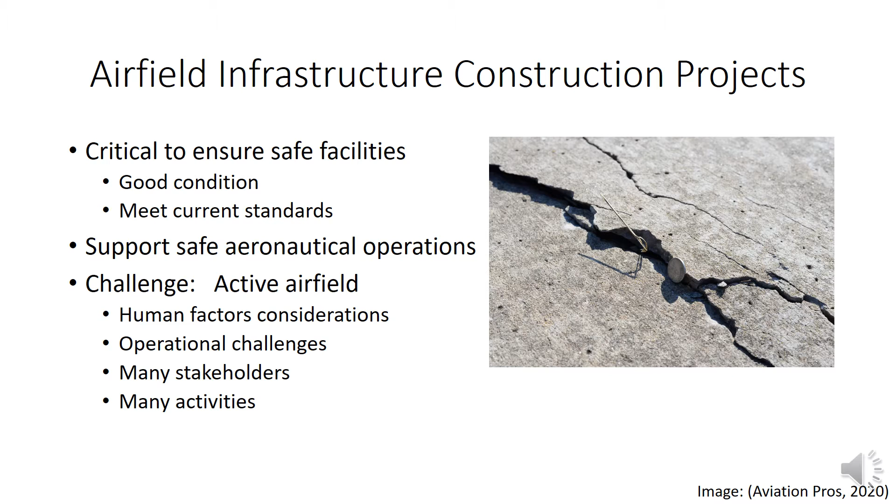Airfield construction projects are challenging because they are usually conducted while aeronautical operations at the airport continue. This introduces human factors considerations and operational challenges, and there are numerous stakeholders and many activities that are affected during these construction projects.

To provide some idea of the scope of airport development and airport construction, let's look at NPIAS, our National Plan for Integrated Airport Systems. NPIAS is the framework for federal funding for airports and the improvements needed. Over $34 billion have been identified for airport projects from 2021 to 2025. This includes reconstruction projects, projects to bring facilities up to current standards, and projects to improve the safety and increase the capacity of our airfields.

Here's an overview of today's presentation. First, I will provide a context for the topic based on literature related to airfield construction. I will present data related to airfield safety and discuss the human factors considerations, which provides a framework for mitigation measures to increase safety during airfield construction.

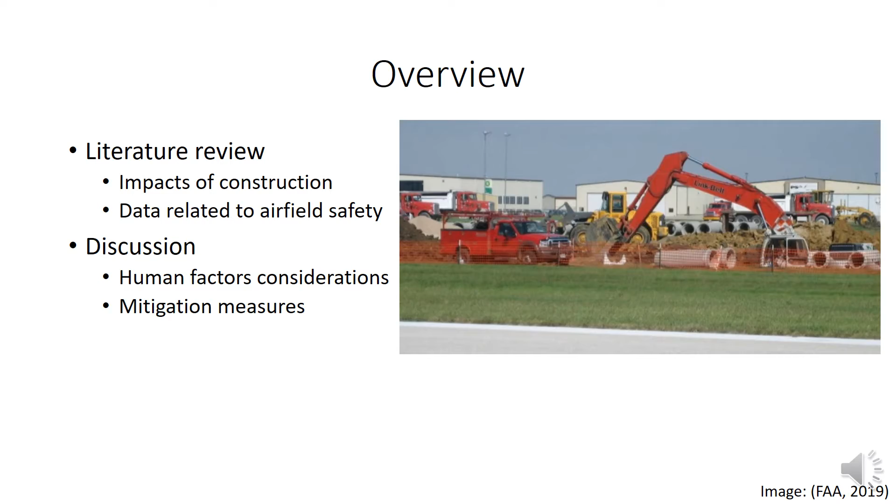FAA recognizes that there are potential safety challenges related to airfield construction and provides a very detailed advisory circular about operational safety considerations during construction. A key consideration is the development of a plan for safety during each phase of construction. These are called construction safety and phasing plans.

Another important component is the use of checklists and daily inspections conducted by the airport ops personnel to ensure safety is maintained on the construction site and the adjacent airfield. Other topics include operational issues and standards for signs and barricades.

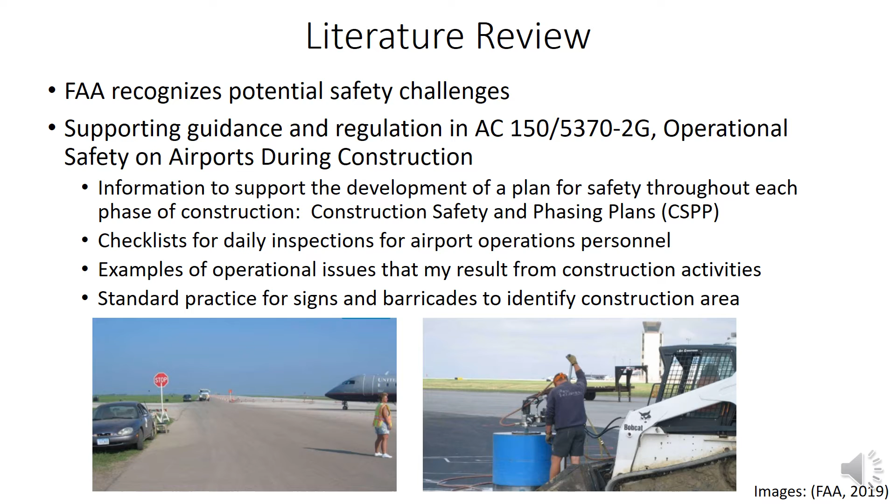There is limited information in scholarly publications related to construction safety at airports. There is some research related to the construction of the Denver International Airport, an enormous project and one of the biggest and most recently constructed new airports in the United States. There were almost 3,000 construction contracts and there were over 4,000 injuries and illnesses, which illustrates the magnitude of the risks to construction workers on a large airfield project.

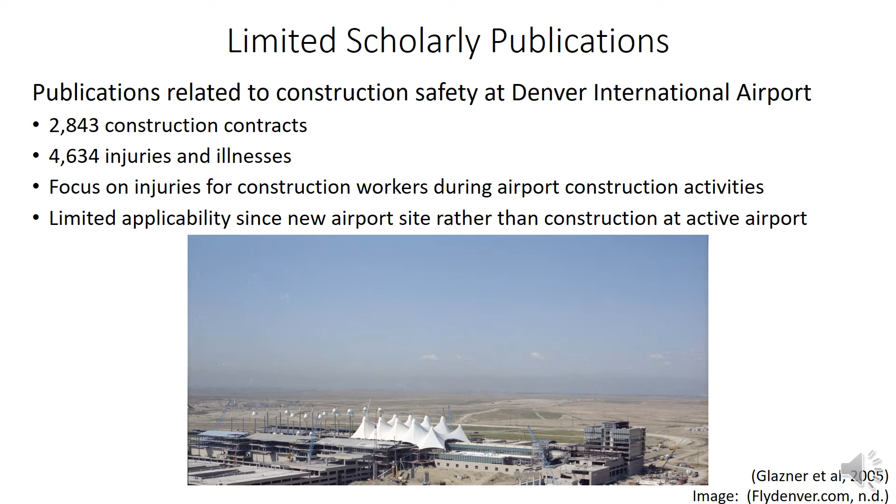This doesn't capture all of the issues related to airfield construction, since this was a new airport site rather than construction at an active airport, which introduces additional challenges. Airfield construction can affect pilots, air traffic controllers, airport operations personnel, and airport tenants. Airfield construction can disrupt flight training and have a significant impact on emergency responders.

There are many construction characteristics that impact how the construction project affects operations at the airport, such as the number of personnel, the kinds of equipment and materials, where the materials are stored, the nature of the construction activity, and where the construction site is relative to the rest of the airfield, as well as site access. Impacts to airport operations include the inspection schedules and the impacts of construction activities on the wildlife hazards, FOD hazards, and security.

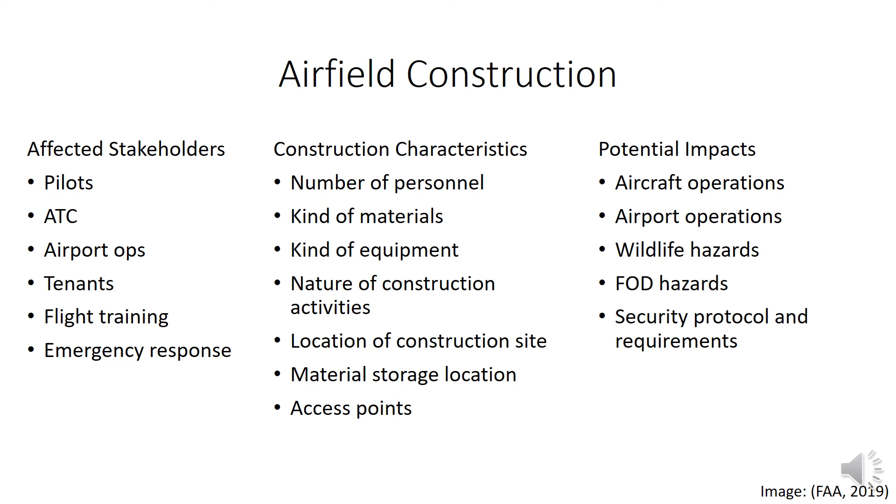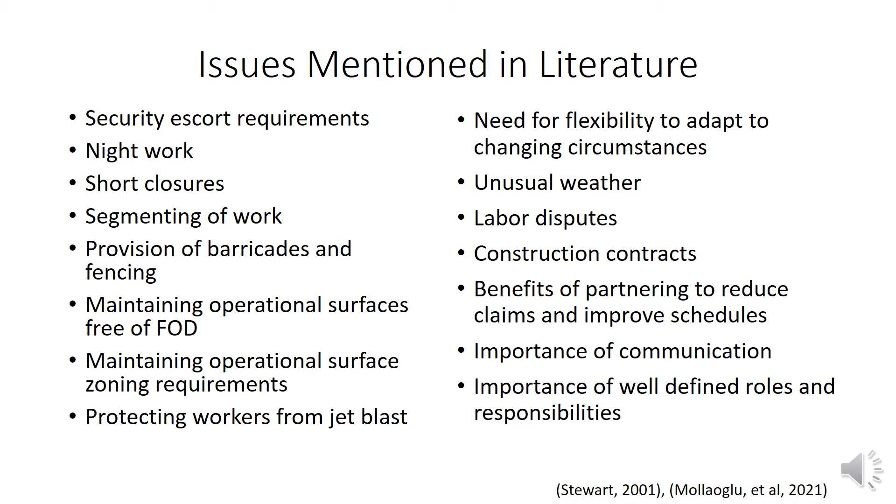Here is a list of issues mentioned in the literature, which include security issues and closures. Some of these issues affect all construction, such as contracting issues, labor issues, and weather. Other topics are unique to airport construction, such as FOD, protection of the operational surface, and protection of workers from jet blast.

This slide illustrates data from the Runway Incursion Database, which is published by FAA. This illustrates the impact of construction on runway incursions. The graph on the left illustrates runway incursions during construction, and the graph on the right illustrates all runway incursions.

During construction, 46% of runway incursions are related to vehicle and pedestrian deviations, which is almost double the percent during all events. Pilot deviations are about 20% during construction, but represent 60% of all incursions. Operational errors due to air traffic control represent 33% of incursions during construction, about double the percentage during all events.

This data suggests that we are doing a good job supporting aeronautical activities during construction, but may need to take a closer look at how we support construction activities, airport operations, and air traffic control during construction.

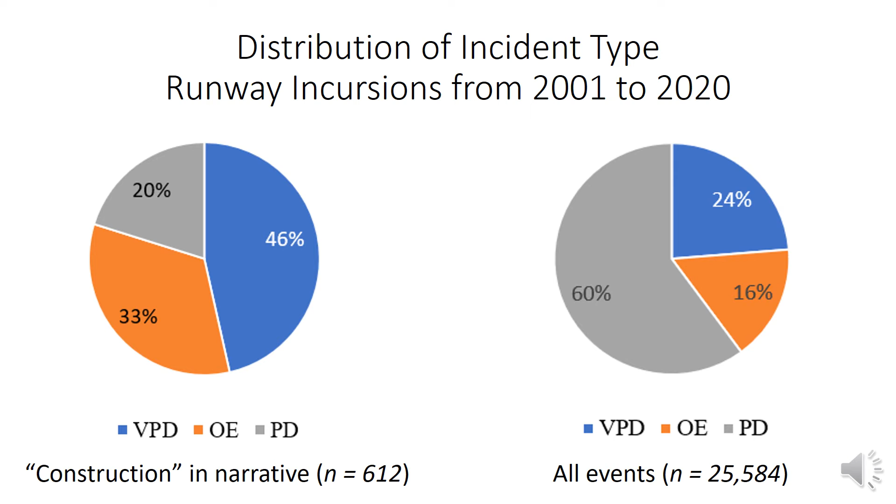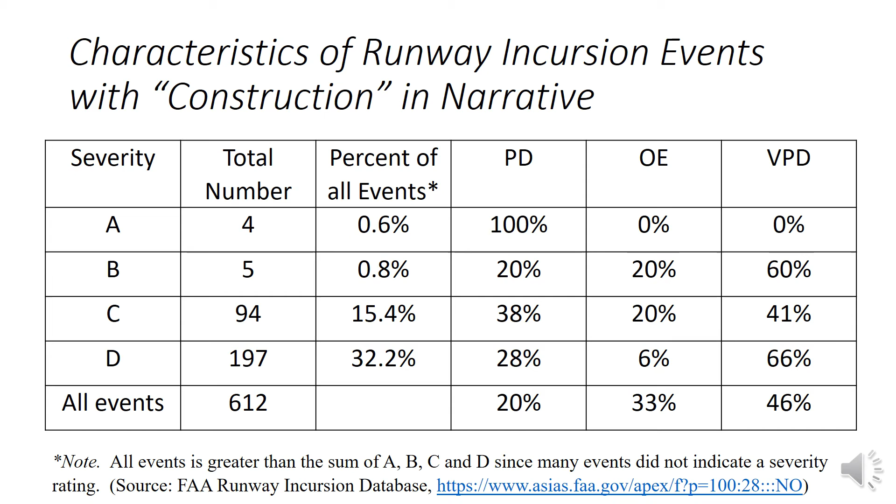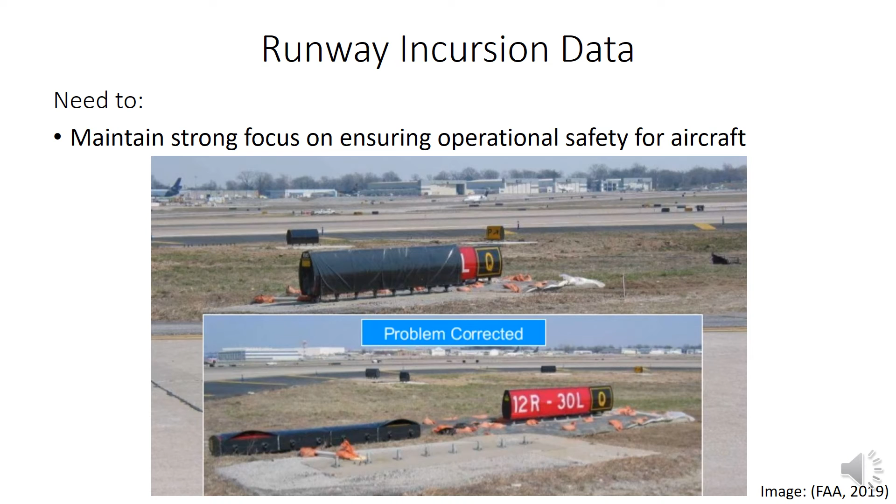The runway incursion data suggests that we need to maintain a strong focus on ensuring operational safety for aircraft, but we also need to make sure we are addressing some of the other airfield users and reducing the likelihood of vehicle pedestrian deviations. Strategies include construction limit signs at regular intervals. These signs support situational awareness for construction personnel and airport ops personnel.

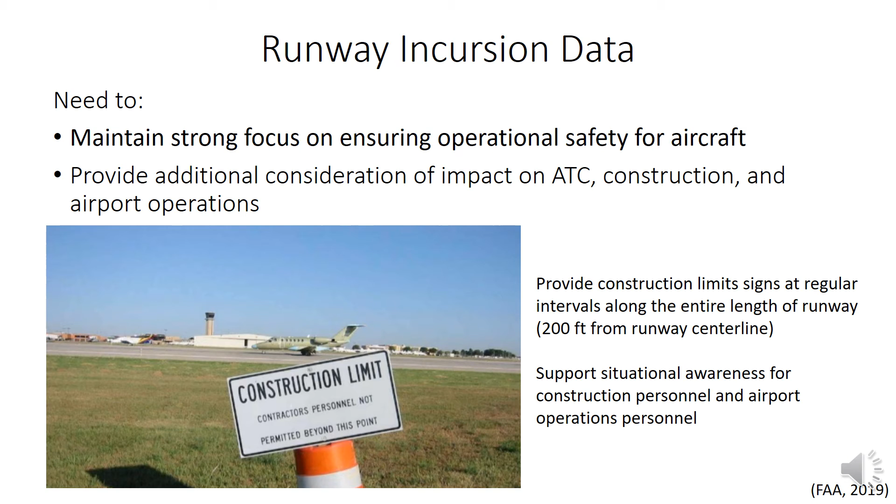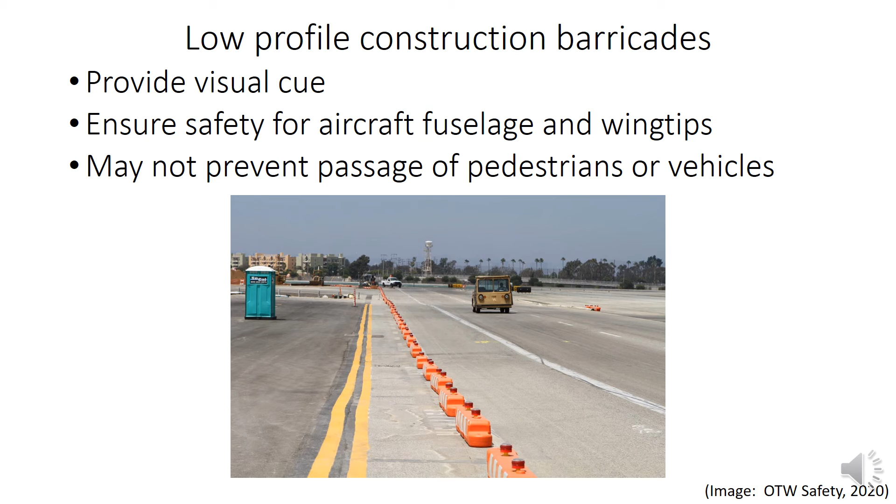Low-profile construction barricades provide a visual cue and they ensure the safety for aircraft since they are lower than the aircraft fuselage and wingtips. However, these barricades may not prevent the passage of pedestrians and some vehicles, so maybe we need to give additional thought as to whether other mitigation measures are required near protected surfaces, and carefully consider this risk and other risks associated with airfield construction in the context of human factors.

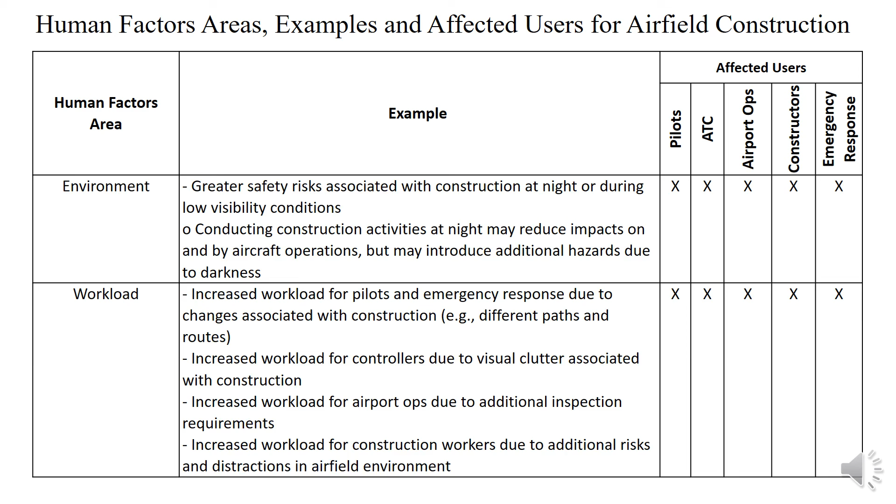Examples are also provided for human error, staffing, situational awareness, and workspace. For human error, NOTAMs are issued to raise awareness of construction activity, but the effectiveness of these NOTAMs may be reduced since there are often so many NOTAMs that pilots need to consider. One consideration for staffing is that airfield ops workers typically are required to conduct additional inspections during construction, as well as take on other duties, although usually additional staff is not provided.

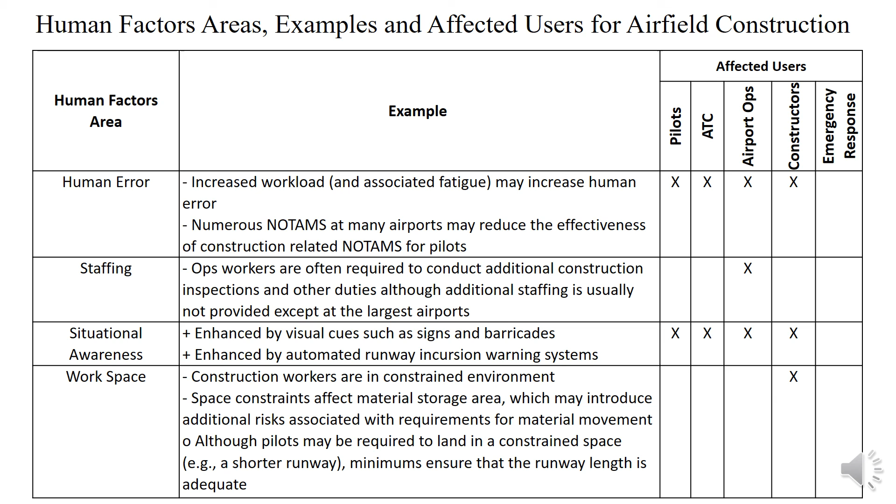Situational awareness is enhanced by visual cues provided by signs and barricades, as well as automated runway incursion warning systems. Workspace is an important consideration, especially for construction workers who are working on an active airfield, which presents numerous safety implications, as well as security and operational considerations.

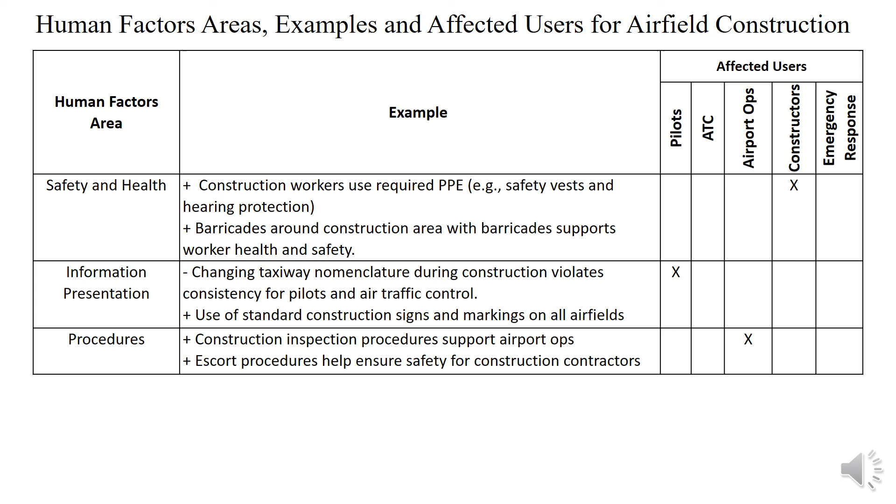The last three human factors areas considered are safety and health, information presentation, and procedures. For these areas, the examples are illustrated as they affect individual categories of users, which illustrates how this method can be tailored to highlight very specific risks, and in the future can be used to map out very specific mitigation strategies. This concludes the primary technical portion of this presentation.